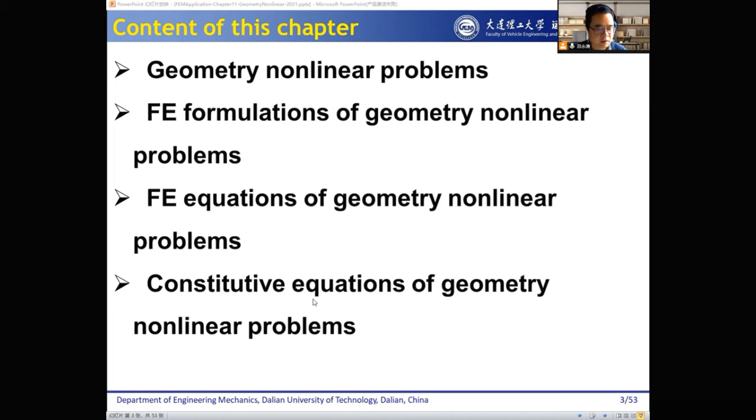For this chapter, we will cover four contents. First is the geometry nonlinear problems. Second, we will go through the FE formulations of the geometry nonlinear problems. Third is the FE equations of the geometry nonlinear problems. And fourth is the constitutive equations of geometry nonlinear problems.

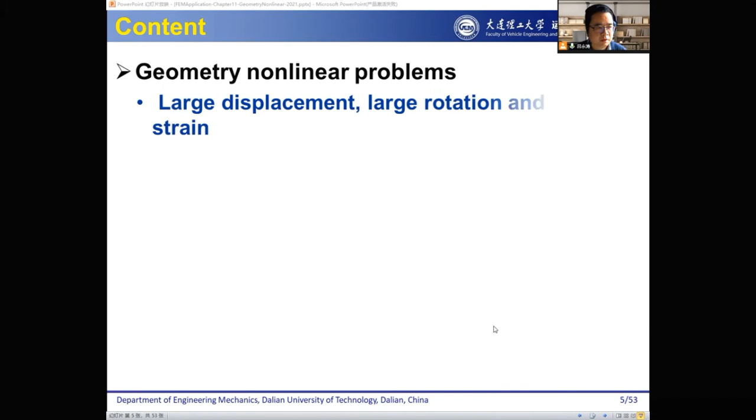Part 1 is the geometry nonlinear problems. First is the definition of the geometry nonlinear problems. So what are the geometry nonlinear problems? It means large displacement, large rotation, and small strain.

This is the first case: large displacement, large rotation, but small strain. And the second case is large displacement, large rotation, and also large strain.

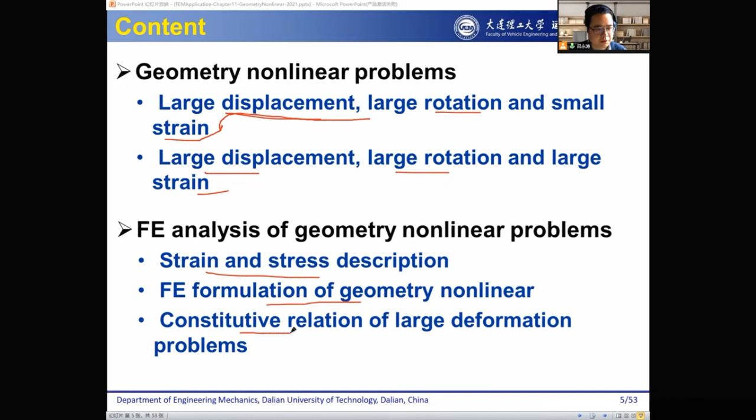And the FE analysis of geometry nonlinear problems: we will talk about the strain and stress description, the FE formulation of geometry nonlinear problems, and also the constitutive relation of large deformation problems.

So here is the definition of geometry nonlinear problems. We said we have two scenarios, and the first scenario is large displacement, large rotation, and small strain. So we use a figure to illustrate this.

In this condition, all the theory we have for the small deformation theory cannot be applied to this scenario. So therefore we have to consider the geometry nonlinear problems, and we have to consider different formulations and use different theories to solve these problems.

We see here the linear theory cannot be applied. In the previous chapter, we all assumed, for example, the geometry equation and the constitutive equation based on the linear theory. But here we cannot apply those theories, and we have to change it. We have to use different theory.

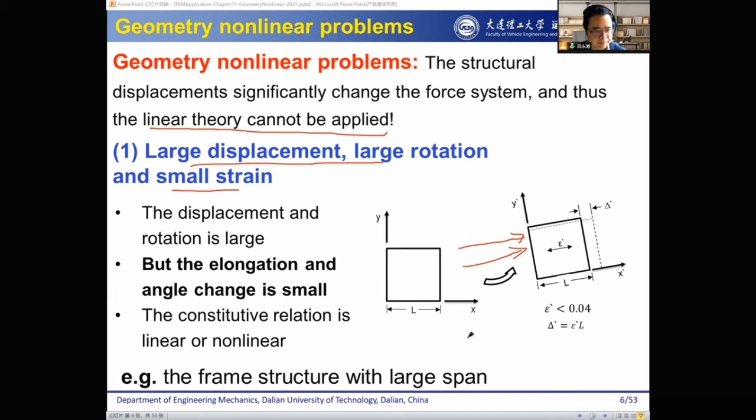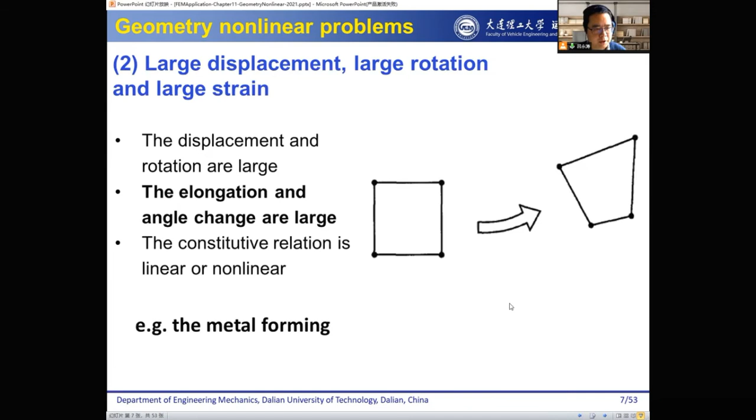And we said for the geometry nonlinear problems, we have to use new theory, new equations and formulations to solve it. And here, also for the strain, we have to define new concepts or new strain variables to describe the large deformation or the geometry nonlinear problems.

We introduce to you how we get those new definitions, how we get those new variables. So to describe the geometry nonlinear problems, we have to use the configuration.

We have to use the configuration. Configuration is the states of the deformed body at different time points. For example, here we say the initial configuration is the deformed body at time 0, before the deformation.

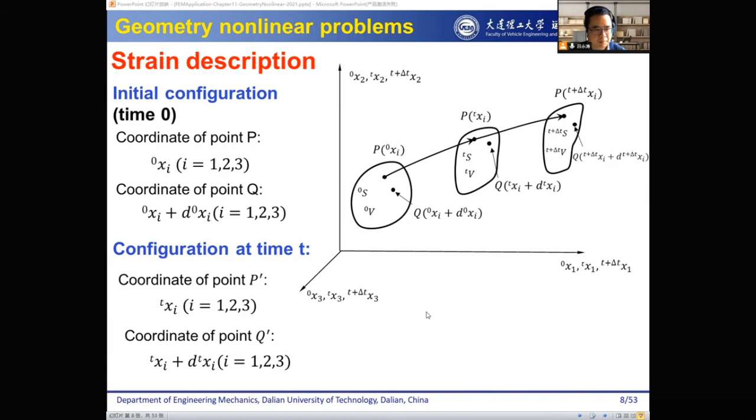So this is the way how we describe the geometry nonlinear problems. And then we come to the strain description. So the change of point location from the initial configuration, that is the time 0 configuration, to the current configuration, that's the time t configuration, can be seen as a mathematical transformation. So the change of point location, from the mathematical point of view, is just a transformation.

So we have the variables in the initial configuration, and then we have the variable in the current configuration. There's a kind of mapping or mathematical relationship between them. Because of the one-to-one mapping, we know it's the same deformable body. You are not able to add more points or remove any point from the deformable body, it's still the same deformable body. Therefore, there's a one-to-one mapping of the points, and the inverse transformation also holds. So we can also use the current configuration variables to calculate the initial configuration variables.

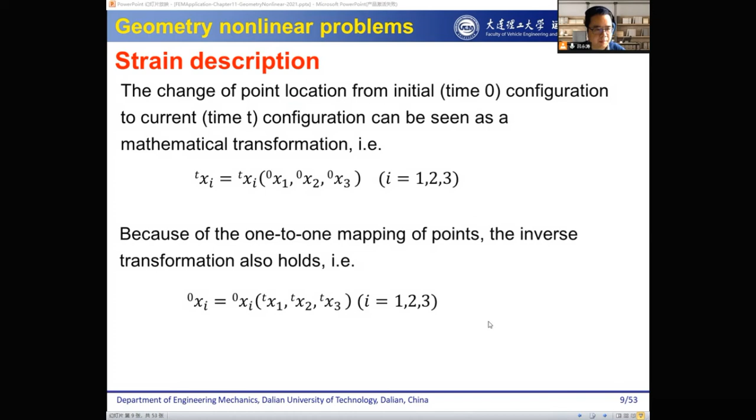So this is what we have in our mind. We have this mathematics in our mind. Then we can divide the strain description in different systems.

Okay, so first we describe the strain in the Lagrange coordinates. Here is the definition for the Lagrange coordinate. What is Lagrange coordinate? It takes the coordinate at the initial configuration as the unknowns to describe the variable, and uses the initial configuration to describe the deformed configuration. So in Lagrange coordinates, the unknown variables are the variables in the initial configuration, because all of them are at time 0, and then we use it to describe the variable in the current configuration. Therefore, it's using the Lagrange coordinates.

Or, in comparison, we have the Euler coordinates. What are the Euler coordinates? The Euler coordinate takes the coordinates at the deformed configuration as unknowns to describe the variable, and uses the deformed configuration to describe the initial configuration. So it's inverse - they use the variable or coordinates in the current configuration to describe the variable in the initial configuration. If we do this, we say it's using the Euler coordinates, described in the Euler system.

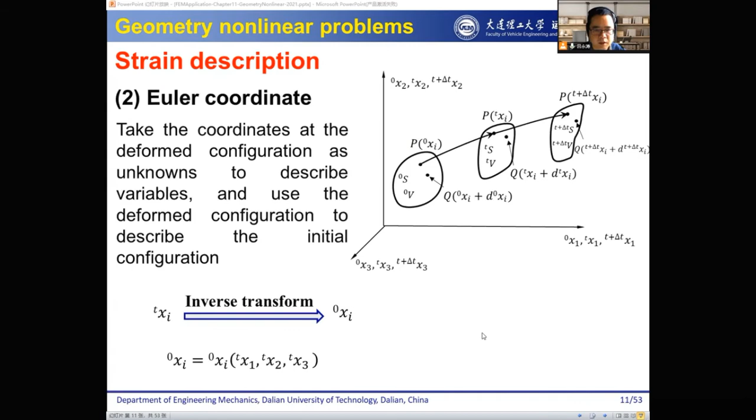So then let's have a look at how we derive the strain, how we work out the formula or expression for the strain in different coordinates or different systems. So first, in the Lagrange coordinate, we already know we use those unknown variables in the initial configuration as the unknowns, and use those to describe the variable in the current configuration. Then our strain, we can write out dxit.

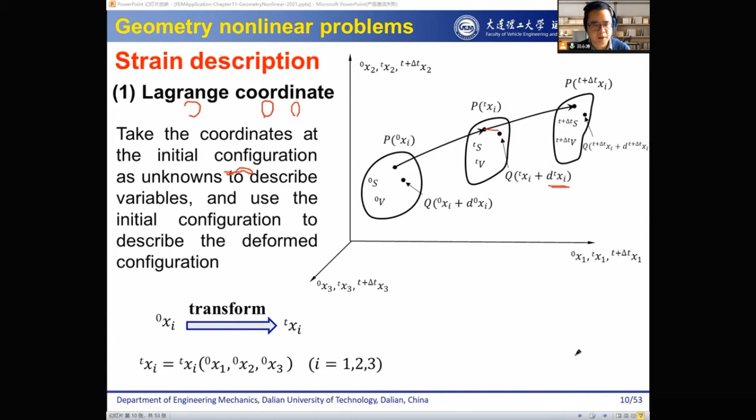What is dxit? We should come to here. This is dxit, that's the distance between P and Q in the current configuration. So this is PQ, the distance of PQ in the current configuration, and dxj. What's dxj? We use j because we want to make a difference to the i. So this is PQ in the initial configuration.

Okay, so we can do the mathematics here. Then we get this result, so we introduce a new symbol. This is our new symbol, similar to the index notation. We want to simplify the writing of these expressions, so people introduced this new symbol, or new rules, to replace the old one. So let's have a look.

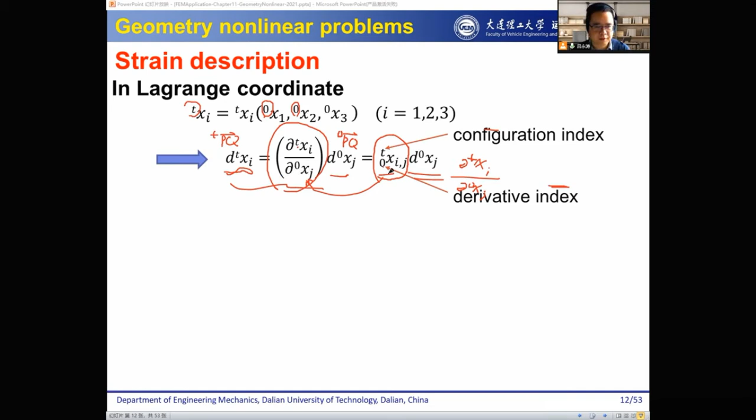So this t means it's the one in the numerator, and this 0 means the one referring to the denominator, and this comma means we take the partial derivative. So this equals partial x. The first i is the one appearing in the numerator, so we say the superscript is the one appearing in the numerator, and this subscript is the one appearing in the denominator, and after the comma, the index appearing in the denominator. So this one is actually this one, but if we write it in this form, it's much easier and much simpler.

And then accordingly, we can have the definition in the Euler coordinates. In the Euler coordinates, we use the variable in the current configuration as the unknowns, and we use it to describe the variable in the initial configuration. And therefore, based on the mathematics, we can have this formula, and we have this symbol.

Then we want to work out the strain. The strain, from the previous lecture, we know, is the change of the length divided by the initial length. Therefore we have to work out the change of the distance between P and Q. If we work out the distance in the initial configuration and in the current configuration, then based on the concept of strain, we can work it out.

Okay, so let's work out the distance. Because it's a distance, we use the square. So ds0, which means this is the ds squared, is dxi0 times dxi0. This dxi0 is the distance between P and Q in the initial configuration, but there's a symbol here which means it can be positive or negative, therefore we take the operation of squaring.

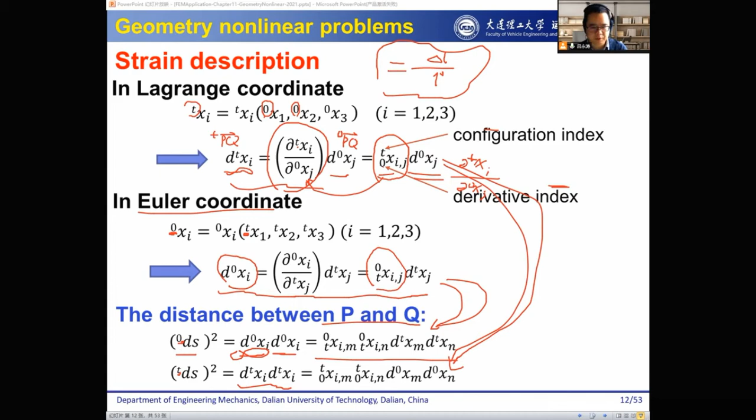And then we want to work out the change of the line, or the change of the distance. The change of distance can be expressed as this, and it can be expressed in two ways. First, using x0, this is in the Lagrange coordinates. Then using xt, this is in the Euler coordinates.

And then from here we know this is the strain, so we can have the definition of strain in two systems: this is Lagrange, using this variable, and this is Euler, using a different variable. But we cannot just say this is the strain in the Lagrange coordinate and this is the strain in the Euler coordinate, so we have to give them new names in order to refer to them.

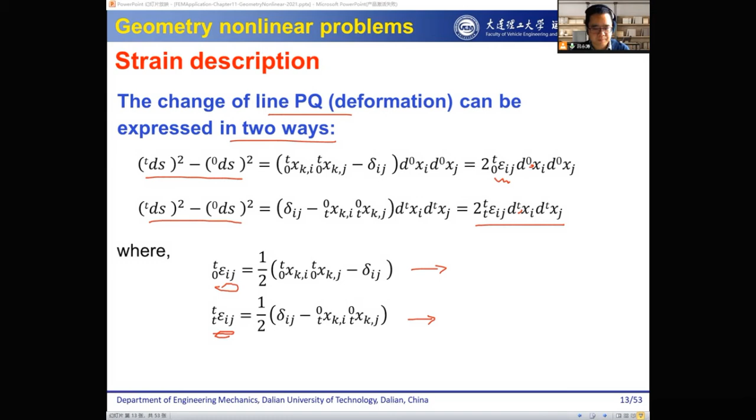So, the strain in the Lagrange coordinate we call the Green strain tensor. This is a very important concept, so whenever you hear about the Green strain tensor, you should have this formula in your mind, and you should know it is defined in the Lagrange coordinate, which means the variables here are the unknowns.

And in comparison, we have the strain in the Euler coordinate system, which is called the Almansi strain tensor. In this formula you have xi,t as the unknowns, because in the Euler coordinate we use the variable in the current configuration as the unknown, and the variable in the initial configuration can be expressed using the variable in the current configuration. This is the concept you should keep in mind forever.

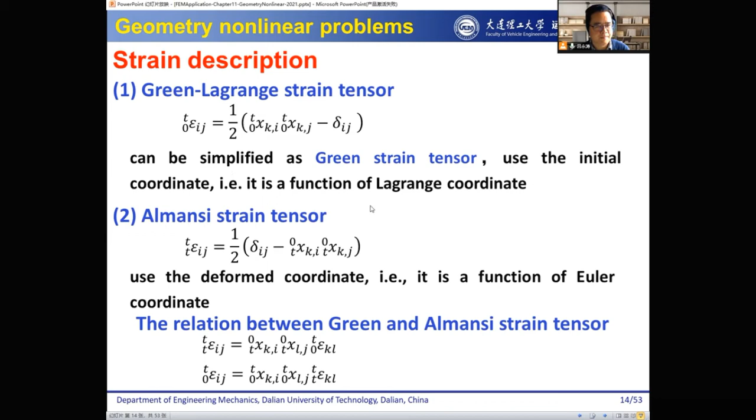So here we have our strain description in geometry nonlinear problems. Let's look at the strain-displacement relationship for geometry nonlinear problems. The displacement of a point from time 0, the initial configuration, to time t, the current configuration, can be expressed as this. This is the point at the current configuration, and this is at the initial configuration. So we can describe the displacement, and then we have this.

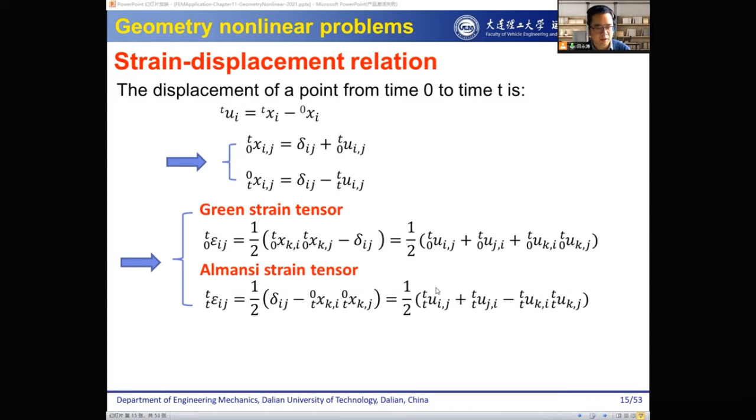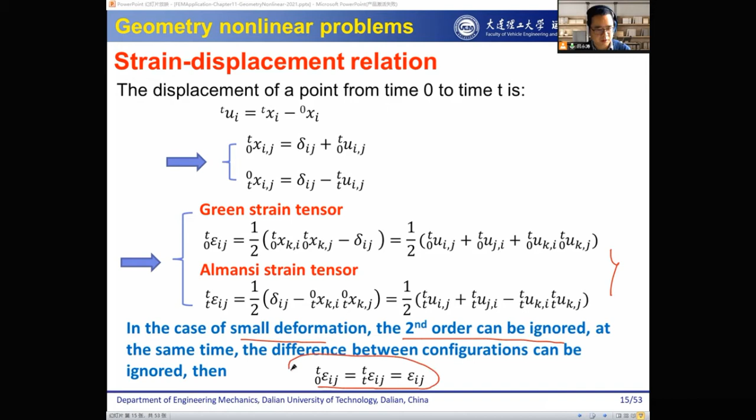By this way, we have worked out the strain-displacement relationship for geometry nonlinear problems, and we can see they are different from the linear case. But if you reduce this to the small deformation case, the second order terms can be ignored, and then those formulas reduce to the linear elastic small deformation formula.

Let's introduce another very important concept, the deformation gradient. The deformation gradient is the vector difference between P and Q. So we have P and Q, and it's the vector difference. Let's look at the vector first in the current configuration, then in the initial configuration. In the current configuration, from P to Q, we describe it as dx_i,t. In the initial configuration, it's dx_i,0, and these are based on the...

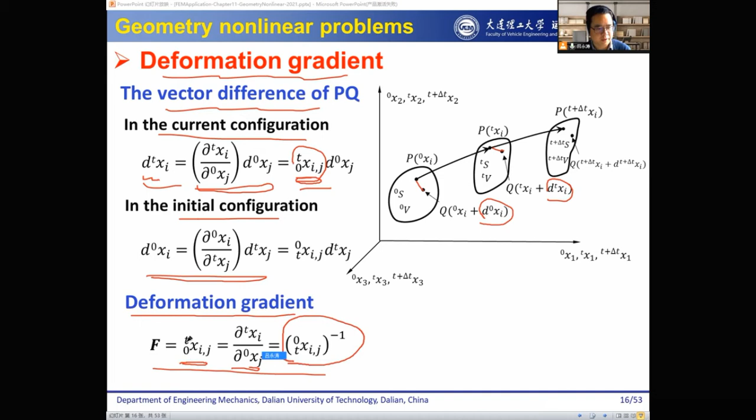This is the mathematics. We can express it like this, and then we introduce this symbol, and express it like this. So we said we define the deformation gradient as the vector difference between these two, between P and Q. Therefore we define it as this, and from the mathematical point of view, it equals to this. So this is our deformation gradient, presented in the current configuration, and we can also express it in the initial configuration. So this is the definition for the deformation gradient. Let's have a look.

How do we work out the deformation gradient? We use an example to demonstrate how we can work out the deformation gradient.

The relationship between the nodal coordinates and time are known. So for this one, it's a triangular element. We have points 1, 2, and 3, and this is at time 0, or the initial configuration, and this is at time t, the current configuration. So it moves to this one. We can see what it's doing - it's doing a rotation, right? You see, it's doing a rotation.

So therefore, we say point 2 moved upwards, and point 3 moved anti-clockwise. We define those variables - the coordinates at time t, coordinates x2 and y2 at time t were this function. We defined the coordinates for point 3 with this function, and by using all this information, we want to work out the deformation gradient for this deformable body.

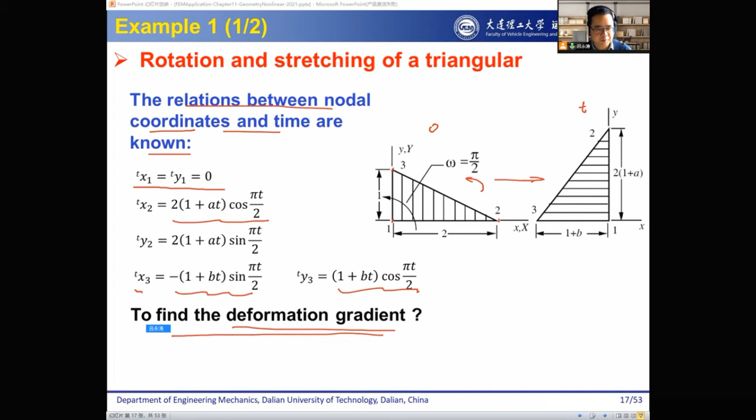Let's have a look at the procedure. At time t, the coordinates of any point within the element, we can write those out. This is based on the interpolation, the idea of interpolation.

So we have the coordinates at the 3 points - these are the 3 points - and then this is ξ1, ξ2, ξ3, which are our interpolation functions. Based on the idea of interpolation, we can work out the coordinate of any point within the element. Then we can work out, at time 0, the initial configuration, by setting t equal to 0. Then we have the configuration or coordinates at the initial configuration. Similarly, for the y coordinate, if we set t equal to 0, then we have the coordinate at time 0.

And then because x10 equals x30 - at time 0, we say the coordinate, this is our x, this is our y - at this initial configuration we can notice the x coordinate of 1 and 3 are equal, and the y coordinate of 1 and 2 are equal. At this initial configuration we also notice for point 2 the coordinate is 2, and for point 3 the y coordinate is 1. So we know all this information from the figure, and then we can work out.

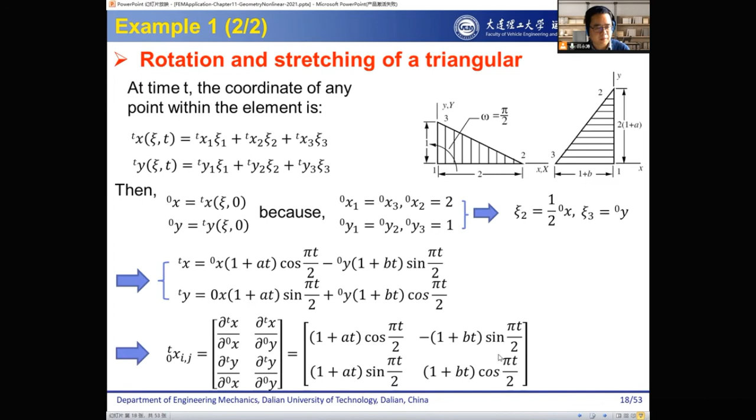By using those equations we can work out the parameters, work out the coefficients for ξ2 and ξ3, and then we can express those equations. After we work out, we can rewrite those equations for x and y, and then based on this, we take the partial derivative to the corresponding variable. Then we can work out this variable - this is the mathematical part of it, and this variable is our deformation gradient. So by this approach we have worked out the deformation gradient.

Second example - let's have a look at how we work out various strains for the one-dimensional problem. Up to now we have introduced the strain defined for the small deformation case, and two strains defined in the large deformation case, or the geometric nonlinear problem case. Here we have a look at how we calculate the different strains.

So we have a 1D problem here, and this is the initial state at time 0, and this is at time t. The initial length is L, and the current length is small l. We have the displacement expressed in this term - this is x(t), and this is x(0). Therefore, the displacement can be expressed in this term, and we want to work out different strains.

First is the engineering strain. We say engineering strain is most used in the small deformation case, and is the change in length divided by the initial length. Because it's a small deformation case, we don't have the higher order term. But these two strains are defined for geometric nonlinear problems, therefore we have the higher order term, to more accurately describe the problem.

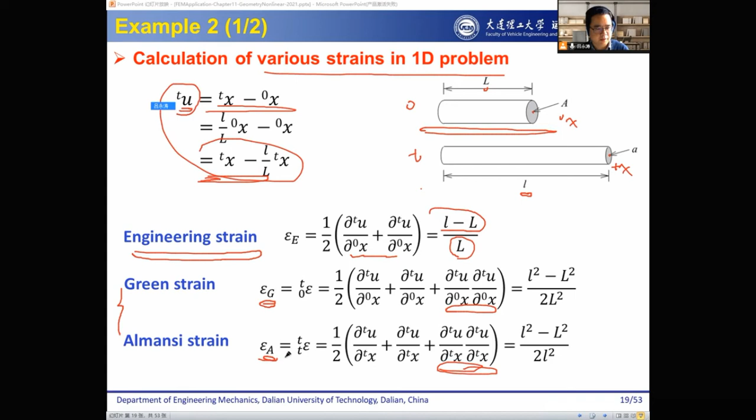So we have the Green strain. Besides, the Green strain is defined in the Lagrange coordinate. And we have the Almansi strain - this is defined in the Euler coordinate system. Then by using this equation, we can work out the Green strain and the Almansi strain.

For the Green strain, we take the partial derivative with respect to x0, because this is our unknown variable. For the Almansi strain, our unknown variable is xt, so we take the partial derivative with respect to xt.

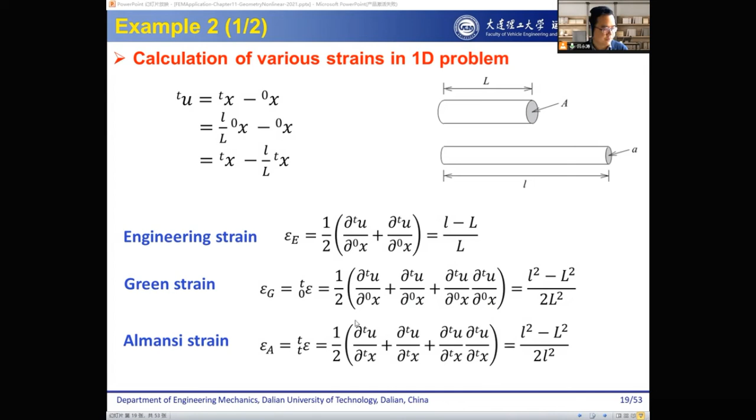This is a very important concept. You cannot use the engineering strain for the large deformation case or the geometry nonlinear case. If you use this, it's wrong, absolutely wrong. You have to use different strains for different scenarios.

When it is bigger than 1.0, it is lengthened, so it becomes longer. When it is smaller than 1.0, it is shortening, becoming shorter. On the y-axis we have the strain. When there's no deformation, the length doesn't change, so the strain is 0. When it becomes longer, we have positive strain; when it becomes shorter, we have negative strain.

So this is clear. When there is small deformation, the strain is small, and we regard this as the small deformation case. In the small deformation case, the values for the three strains are identical.

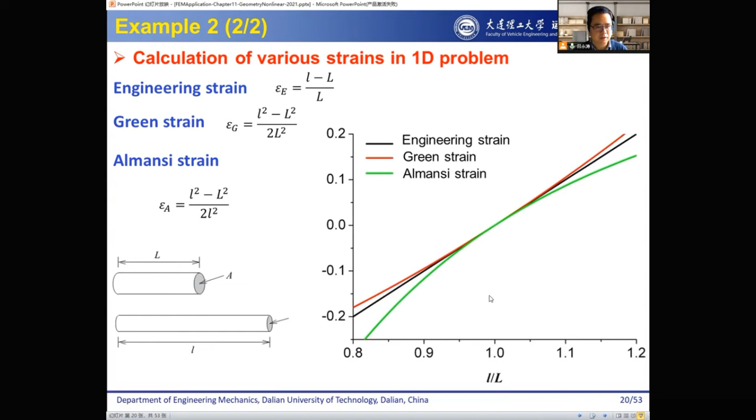So it's very important you keep this figure in mind forever. Don't make mistakes when choosing which strain to describe your problems. We have talked about strain description, and said that for geometry nonlinear problems we have different strains, and we should use the appropriate one for different scenarios. Now we talk about the stress description for geometry nonlinear problems.

Here is the definition for stress. We look at the figure with the Lagrange coordinates and the Euler coordinates. We have x0 and xt, x0 in the Lagrange coordinate, xt in the Euler coordinate.

For the geometry nonlinear problem, we have the Cauchy stress, which we call the true stress. Cauchy stress is the force in the unit area in the deformed configuration, similar to the true strain.

For the true strain, we divide in the deformed configuration. And we have the engineering stress, which uses the force in the unit area in the initial configuration, corresponding to the engineering strain, which is the change in length divided by the initial length.

Let's have a look at the stress. Before deformation, the stress is the force divided by the initial area. After deformation, the stress is the force divided by the deformed area, or the area in the current configuration.

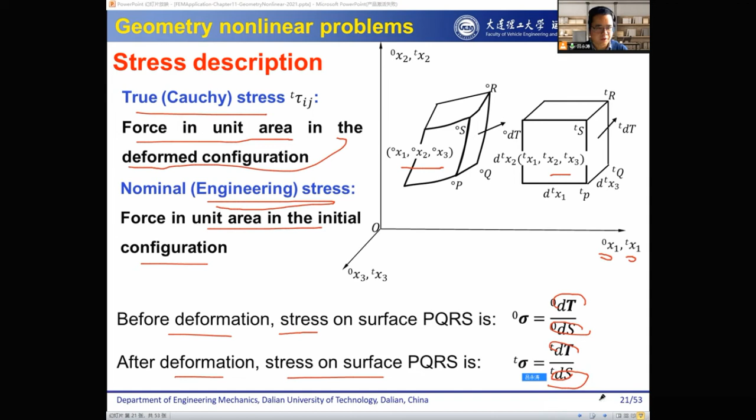There's a relationship between the surface force before and after deformation. This should be easy to understand. Then we have the Lagrange definition, where the force component is equal before and after deformation. If we use the Lagrange definition, the surface force before deformation, that's the initial configuration, and after deformation, that's the current configuration, are made equal to each other.

And we have the Kirchhoff definition. By the figure, it corresponds to this: we have the initial configuration and the current configuration, and the surface force is equal to each other in the two configurations.

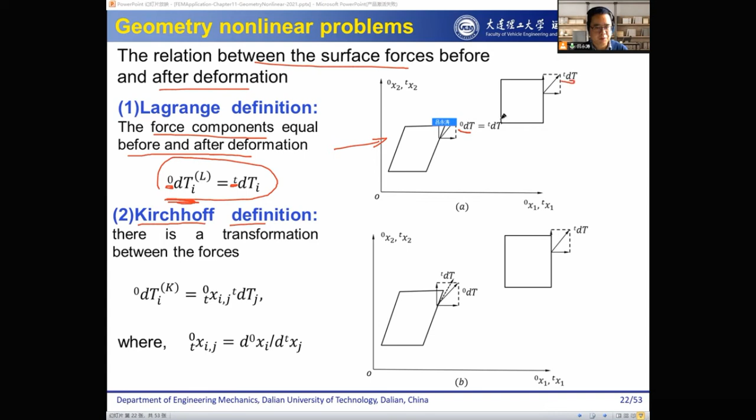This is the Lagrange definition. But in the Kirchhoff definition, there's a transformation between the forces. So we have the force in the initial configuration and the force in the current configuration. They don't equal each other, so there's a transformation between them, described by this transformation function. This is the definition because we want to describe different scenarios.

I think there'll be a mistake here. It should be - sorry, this is right. So this is the definition of this variable.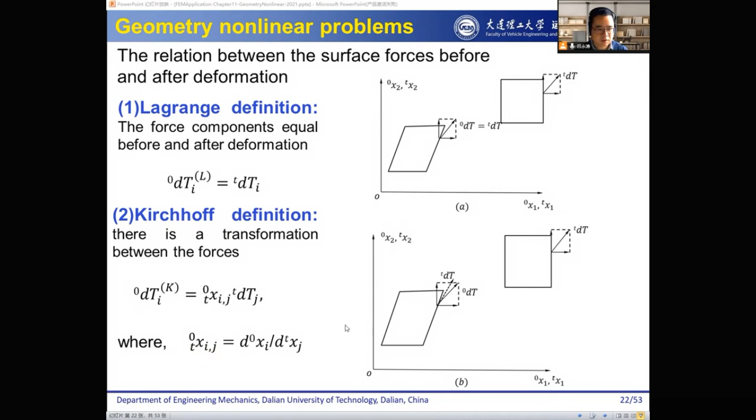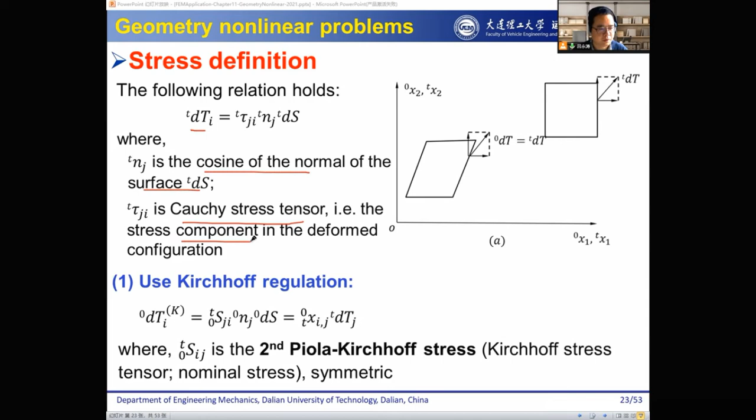Then we have the stress definition. We have the following relationship holds, where n is the cosine of the normal of the surface, and tau is the Cauchy stress tensor. That's the stress component in the deformed configuration. So we have the following relationship.

First we use the Kirchhoff regulation, which means we use this assumption that the forces don't equal each other. Under the Kirchhoff definition, we can express the force, and this one is the Kirchhoff stress, which we call the second Piola-Kirchhoff stress, or Kirchhoff stress tensor, or nominal stress, because it uses the surface area in the initial configuration.

Then we use the Lagrange regulation. Using the Lagrange regulation, this is the surface force in the initial configuration, and this is the surface force in the current configuration. Then we can obtain another variable, which we call the first Piola-Kirchhoff stress, or the Lagrange stress, because we are using the Lagrange regulation.

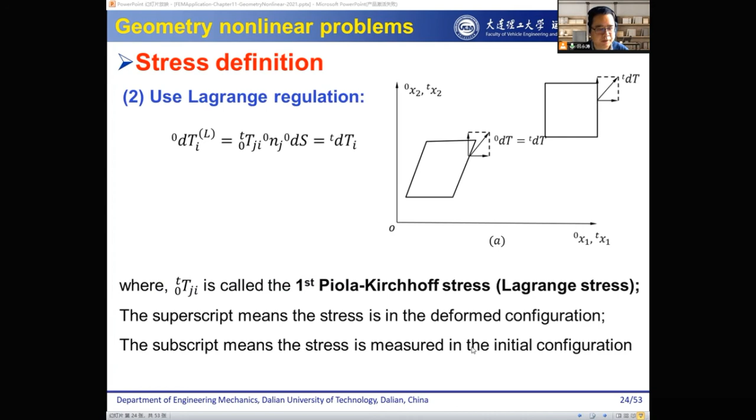So for the stress, we have introduced two very important concepts that you will meet very often in your future study or engineering problems: the second Piola-Kirchhoff stress, also called Kirchhoff stress or nominal stress, and the first Piola-Kirchhoff stress, or Lagrange stress. You should be very clear how they are obtained and what's the difference between them. We should know these are the stresses for geometry nonlinear problems, so it's for the large deformation case.

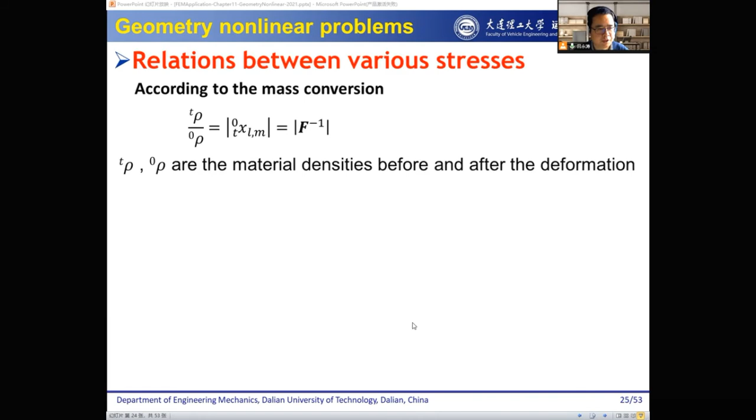From the mathematical point of view, we can also know there's a relationship between different stresses. According to mass conservation, the mass doesn't disappear, so we have this mathematical formulation, and then we can obtain the relationship between the Cauchy stress and the first Kirchhoff stress. Also we can obtain the relationship between the Cauchy stress and the second Kirchhoff stress.

Also, from a mathematical point of view, we obtained the relationship between the first Kirchhoff stress and the second Kirchhoff stress. So for geometry nonlinear problems, similar to before, we obtained three variables: the Cauchy stress, the first Kirchhoff stress, and the second Kirchhoff stress, and there's a relationship between these different variables.

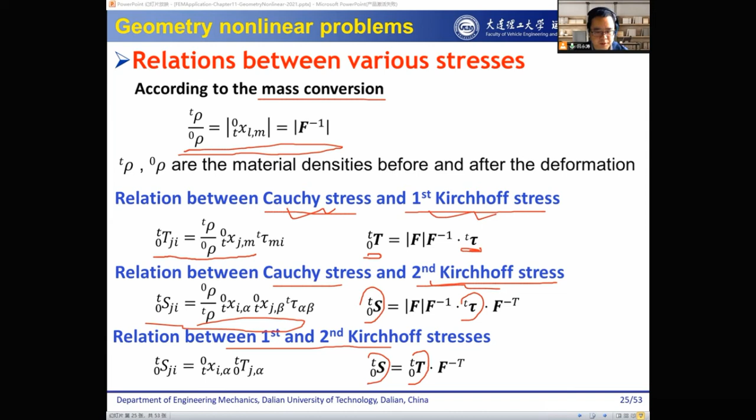So let's have a look at an example to demonstrate how we calculate different stresses for geometry nonlinear problems. We have a deformable body here, and what it's doing, I think, is rotation. Okay, it's doing the rotation. Let's have a look.

We use the deformation gradient to describe the deformation, and we gave the initial Cauchy stress, and we have the deformation gradient, and we want to work out other stress components like the first Kirchhoff stress and second Kirchhoff stress. We set the time t, because the deformation gradient is a function of t, and we set time t as this.

Then we get the formulation for the deformation gradient, the Jacobian of the deformation gradient equals 1, and then our Cauchy stress equals this. Based on the relationship between Cauchy stress and the first Piola-Kirchhoff stress, we can work out, from the mathematical point of view, the first Kirchhoff stress. Similarly, we can work out the second Kirchhoff stress. There's nothing we want to go into too much detail about, because this is only the mathematics here.

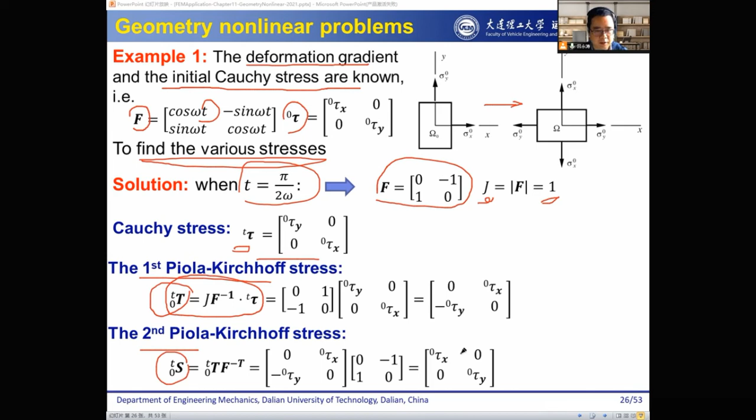And then the second example is to work out the various stress for the uniaxial tension problem. So we have a uniaxial tension. For the uniaxial tension, we want to work out the various stress, and this is uniaxial.

And because it's a uniaxial tension problem, we have this relationship. This is the deformed length, this is the initial length, and this is the deformed dimension in the y direction. This is the initial dimension in the y direction, and this is the deformed dimension in the z direction, and this is the initial dimension and the length in the initial length.

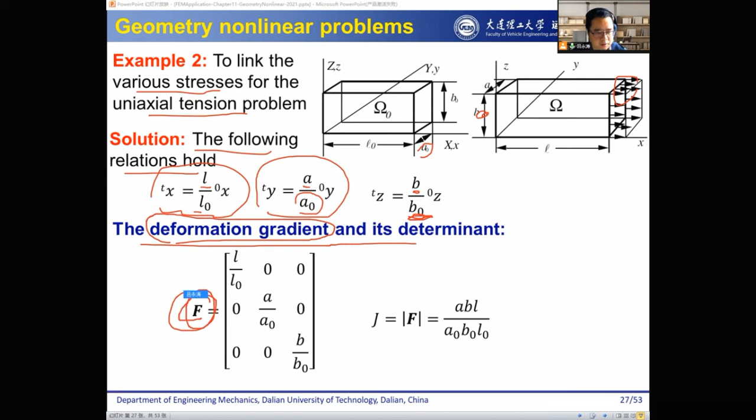Then we work out the deformation gradient. Deformation gradient is very important for geometry nonlinear problems, because all other variables are worked out from the deformation gradient. So by using these equations, we can work out the deformation gradient for these problems, and then continue our calculation to work out other variables.

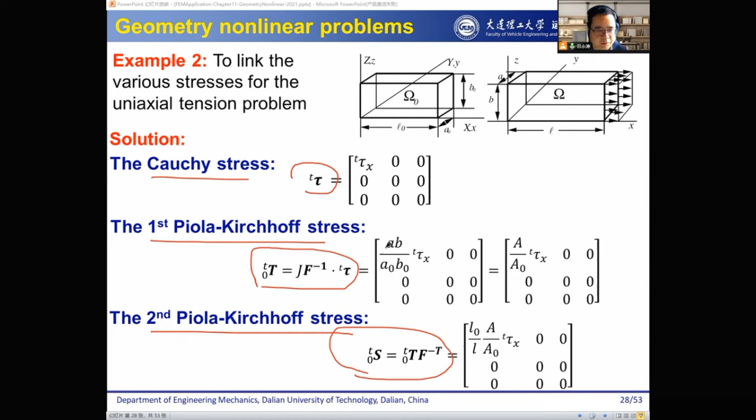First is the Cauchy stress. Second is the first Piola-Kirchhoff stress. Third is the second Piola-Kirchhoff stress. Once we work out the Cauchy stress, we can use the relationship to work out the first Piola-Kirchhoff stress and the second Piola-Kirchhoff stress. This is also mathematics, so we don't repeat it here. You should practice working it out by hand yourself to see whether you can get those results or not.

So then part 2 is FE formulations of the geometry nonlinear problems. For this part, we are going to quickly go through it. We don't go into too much detail here.

For the FE formulations, similar to the previous problems, we use the virtual displacement principle. But the difference is we use the variables in different configurations to represent the quantities and to represent points.

So we have those three variables: this is referred to the coordinates at time 0, this is referred to the coordinates at time t, and this is referred to the coordinates at time t plus delta t. Then u is the point displacement referred to time t, this is referred to time t plus delta t, and we have the relationship between each other. Then the displacement increment can be written as this - it's the difference between the displacement at t plus delta t minus the displacement at t.

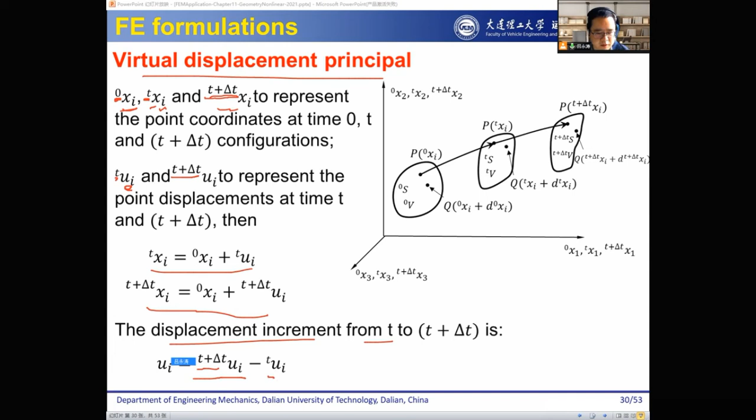Then we can write out the virtual displacement principle at t plus delta t. For geometry nonlinear problems, you have to mention which time point you are working at. This is important here because we are working at t plus delta t, so we have all those variables expressed at t plus delta t. Here the tau is the Cauchy stress at the t plus delta t configuration. Then we have the strain, then we have the virtual work at t plus delta t.

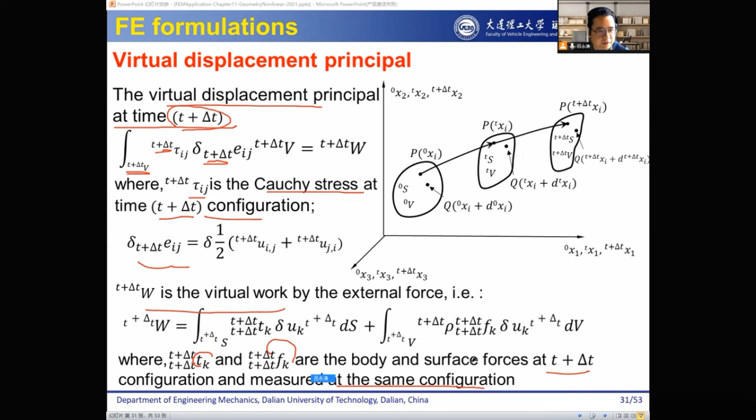And here this is the body force, and this is the surface force at the t plus delta t configuration, and they are measured at the same configuration - so they are measured maybe at the current configuration.

Then we have the virtual displacement principle expressed as this. It's very similar to our previous equation, but the only difference is we have put the configuration into those formulas. Because the variables at the t plus delta t configuration are unknowns, we use those as the unknown, the above equation cannot be solved, so we need to refer to one known variable or known configuration, and therefore the following two methods are proposed. Depending on which configuration we take as the known configuration, we have different methods.

First is the total Lagrange format. In the total Lagrange format, the variables use the initial configuration as the reference configuration. Then we have the updated Lagrange format. In the updated Lagrange format, all the variables use the deformed configuration - that's the configuration at t - as the reference configuration, and therefore the configuration keeps changing in the solving process.

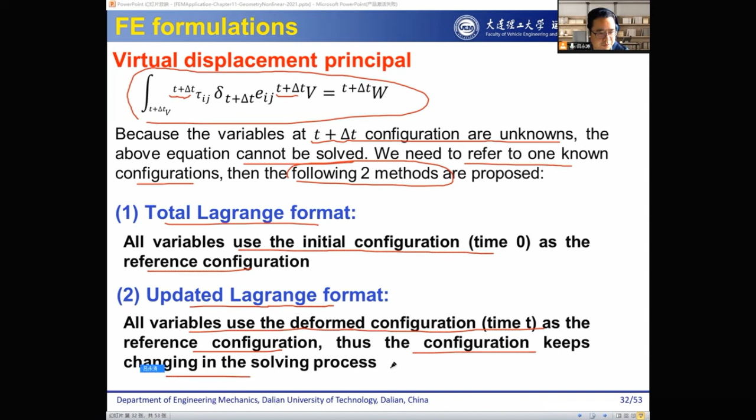First is the total Lagrange format. In the corresponding virtual work principle, the deformed configuration is transformed into the initial configuration, because for the total Lagrange format we use the initial configuration. Therefore we change to the initial configuration, and those are the zeros - these are the initial configuration.

We mentioned we have the 1-to-1 mapping, therefore we can easily make the transformation, and the transformation process is as below. So we have the surface and body force equations, and we have the mass conservation principle. We take use of those equations to do the transformation - those are the many mathematics involved.

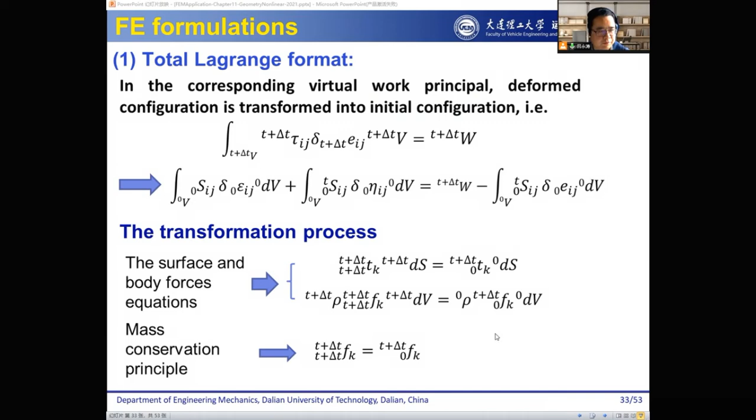Then we have the variation of the strain, and also for the strain we use the total Lagrange format. Therefore we have the Kirchhoff stress and the Green strain tensor at the t plus delta t configuration. We use the initial configuration as the reference, and then the virtual displacement principle based on the initial configuration can be written as this. We use those as the reference. So this is the total Lagrange format.

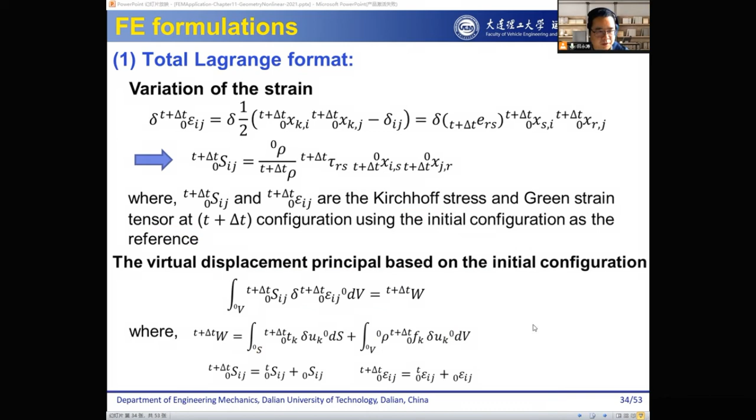Then we have the updated Lagrange format. In the updated Lagrange format, the corresponding virtual work principle, the deformed configuration is transformed to the time t configuration. So we say this is after the transformation. So we have the variable in the current configuration - we have transformed those into the current configuration, therefore we expressed it in the updated Lagrange format.

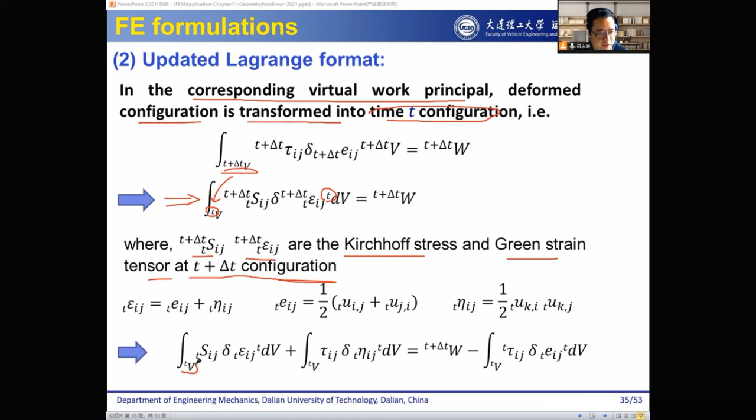And those are the variables - those are the Kirchhoff stress and the Green strain tensor at t plus delta t configuration. We have transformed all of them into the time t configuration - these are the time t configuration.

Then we have the process of linearization of the equilibrium equation. The virtual displacement formulations are nonlinear, and therefore we linearize this equation first, and then solve them. Similarly, for the linearization of the relationship, we have two formats: the total Lagrange format and the updated Lagrange format. The difference is we take different configurations as the reference.

Some discussion points here: first, the relationship only applies to linear elastic material. For elastic plastic material, the linear relationship applies to link stress and strain rate. For other materials, rather than linear elastic material, when the increment is small enough, the above relationship can be applied, and when the increment is a finite value, the relation is an approximate value. An iteration method is usually applied to update the stress.

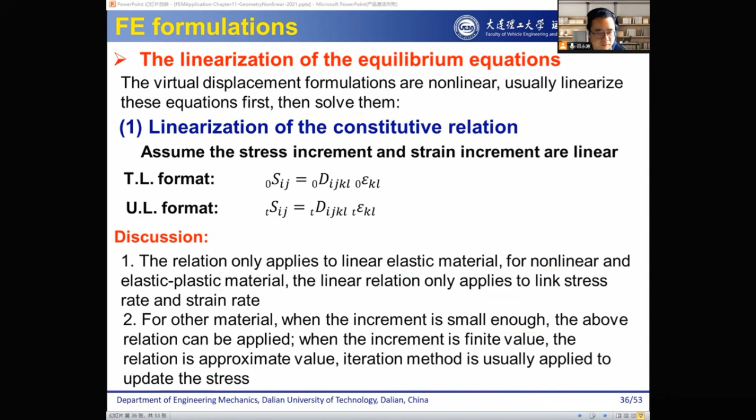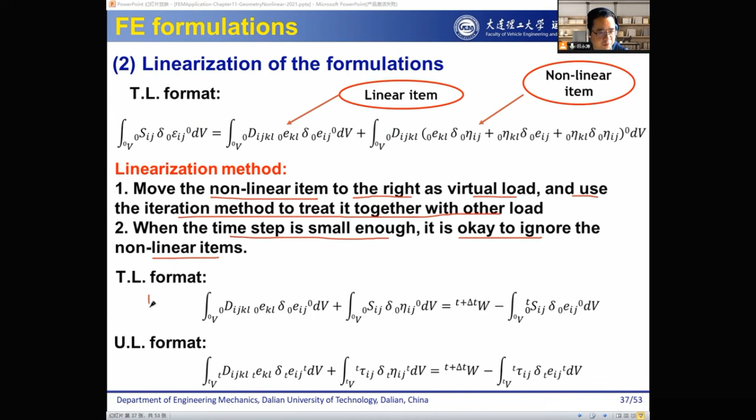For the linearization of the formulation, we have the total Lagrange format - this is the linearization method. We move the nonlinear item to the right as virtual load, and use the iteration method to treat it together with other loads. When the time step is small enough, it's okay to ignore the nonlinear term. So we have the linearization equation in the two kinds of formats.

So part 2, we have very quickly gone through those - these are many mathematical equations, and it's not very important, but if you are interested you can read relevant books. Then part 3, FE equations of geometry problems and its solutions. We have mentioned FE equations before - let's have a look how we apply them to geometry nonlinear problems.

So we have all those equations for the static problems. We have the point coordinate within the element expressed in interpolation. This is our coordinate at the current configuration, this is the coordinate at t plus delta t configuration, and we express it in interpolation format. Those are the coordinates at the nodes, and this is the interpolation function, or shape function.

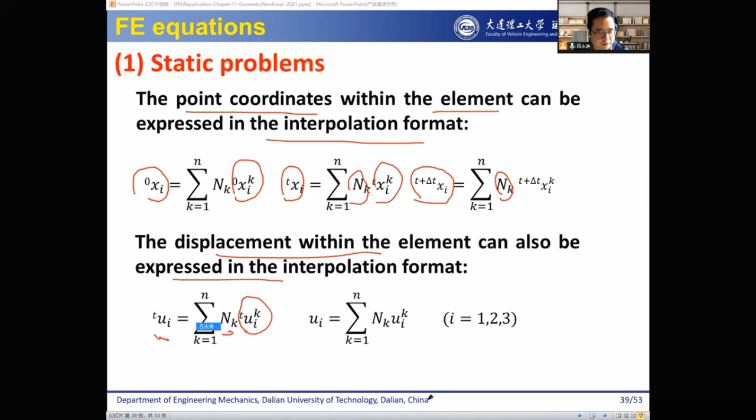And the displacement is also expressed in interpolation format. So this is the displacement, this is the displacement at the node, and this is the shape function or the interpolation function.

Then we have the total Lagrange format equation, which means we take the initial configuration as the reference - therefore these are the zeros, we use initial. This is our stiffness equation for the geometry nonlinear problems. We are very familiar with this equation for the general small deformation case. This is the corresponding equation for the large deformation case, and here we define different variables, including the nonlinear items. This KL0 is the element stiffness matrix in the small deformation case.

So then we have some cases for the geometry nonlinear problems. Here is the stiffness due to the initial displacement, called the initial displacement matrix.

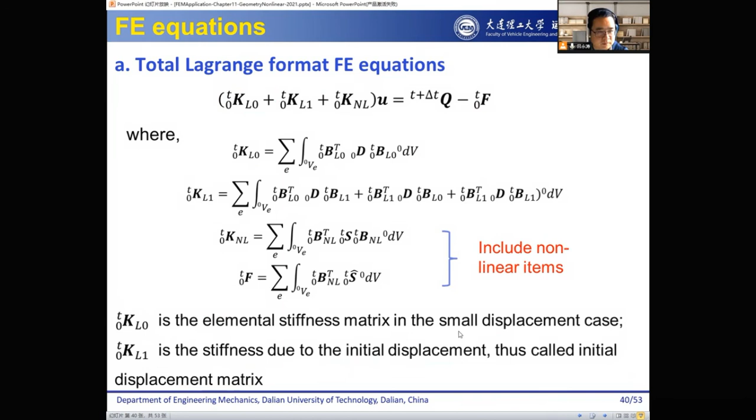Then we can also express the stiffness equation in the updated Lagrange format, using the current configuration as the reference. Here we have the stiffness matrix and the external force. B is the strain-displacement matrix corresponding to the linear and nonlinear strain, and D is the material constitutive matrix, same as the linear elastic case, and tau is the Cauchy stress tensor.

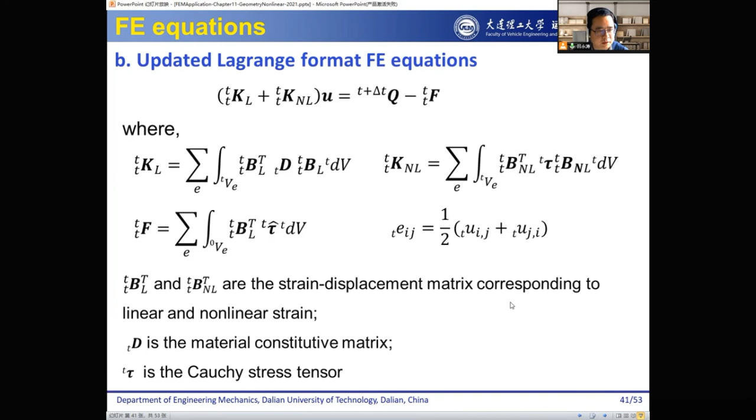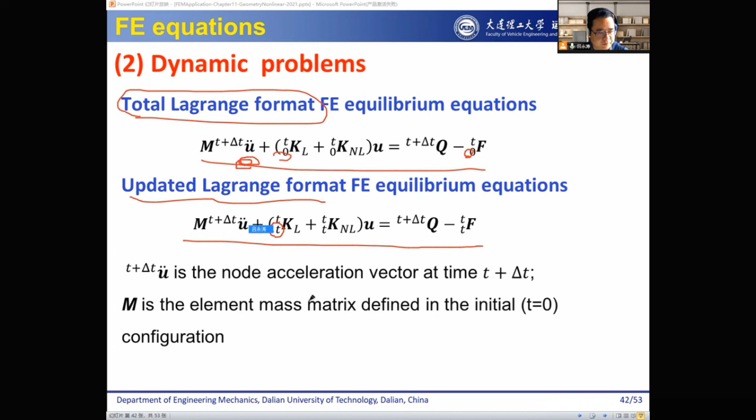This is for the static case, and for the dynamic case we have to introduce the acceleration. For the geometry nonlinear problem, we have two kinds of formats. First, the total Lagrange format, taking the initial configuration as the reference - this is the equilibrium equation for geometry nonlinear problems. For the updated Lagrange format, we use the current configuration as the reference.

Then we quickly go through the method for solving the FE equations. The basic idea is at each time point, or increment step, we use the nonlinear equation solving method to obtain the solution through iteration. The commonly used iteration method is the direct iteration or Newton-Raphson method, as mentioned in the nonlinear chapters.

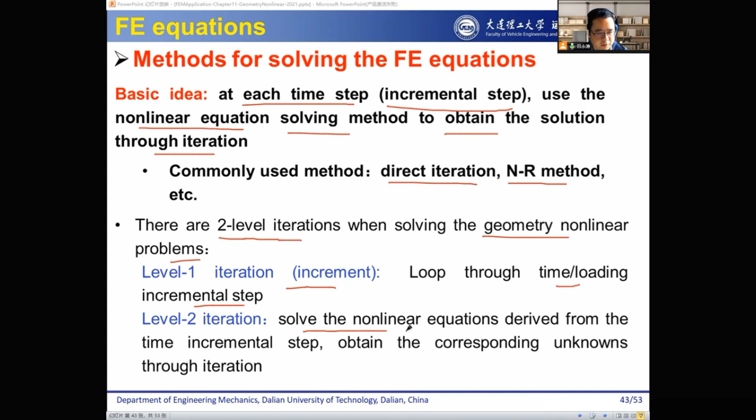There are two level iterations when solving geometry nonlinear problems. The first iteration is the increment - we loop through the time or loading increment step. The second level iteration is to solve the nonlinear equation derived from the time increment step, obtaining the corresponding unknown through iterations. There are two levels of iteration.

Then we introduce the method to solve the FE equations. First, the static problems - this is our stiffness equation in the total Lagrange format, and then we have the stiffness equation in the updated Lagrange format.

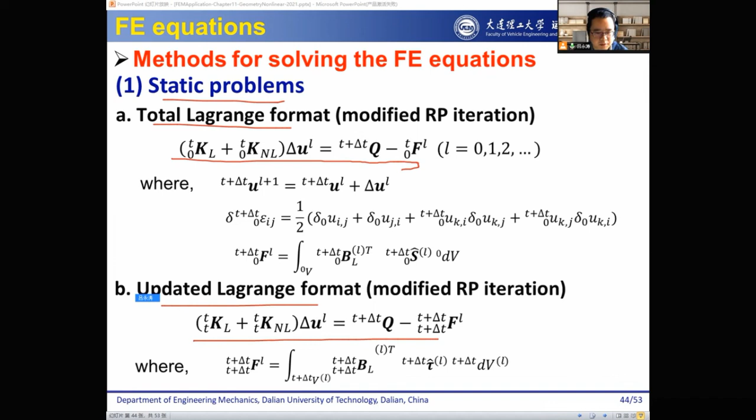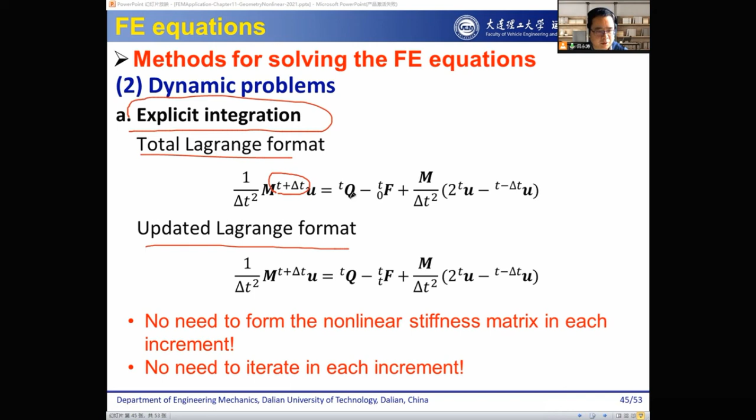For the dynamic case, we have the equation in the total Lagrange format and the updated Lagrange format, using explicit integration. If you still remember the explicit algorithm - for the explicit algorithm, the variable at time plus delta t can be directly solved from the previous variables, the variable at the previous time point. You see in the right hand of the equation, all the variables are from the previous time point. We are using explicit integration here too.

Those can be solved using the values at the previous time configurations. For this method, there's no need to form the nonlinear stiffness matrix in each increment, and there's no need to iterate in each increment. Those are the advantages. Then we have the implicit integration.

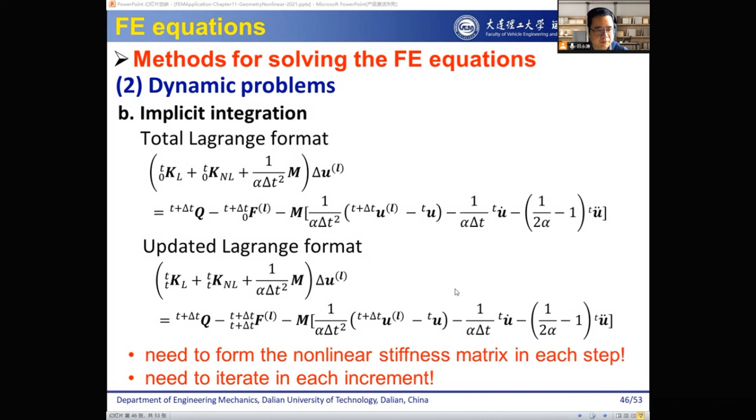For the implicit, you see those variables in the right hand of the equation - this is a dynamic problem, so we have the acceleration in the equations. For implicit integration, we have to form the nonlinear stiffness matrix and iterate in each increment, because those variables cannot be directly solved - we have to do iteration for those nonlinear equations in order to solve this. So for dynamic problems, explicit integration is more efficient than implicit integration, but sometimes explicit integration can give error answers and problems.

Let's do a quick summary of the difference between the total and updated Lagrange format. First, the reference configuration is different. Second, the total Lagrange method contains the initial displacement matrix, while the updated Lagrange method only uses the current displacement matrix. In the total Lagrange method, stress and node force are derived from the Kirchhoff stress. In the updated method, the Cauchy stress is used, so we need transformation through the Kirchhoff stress. In the total Lagrange method, the coordinate transformation matrix stays the same, but in the updated Lagrange method, the coordinate transformation needs to be updated. The updated Lagrange format is more applicable to non-elastic large strain problems.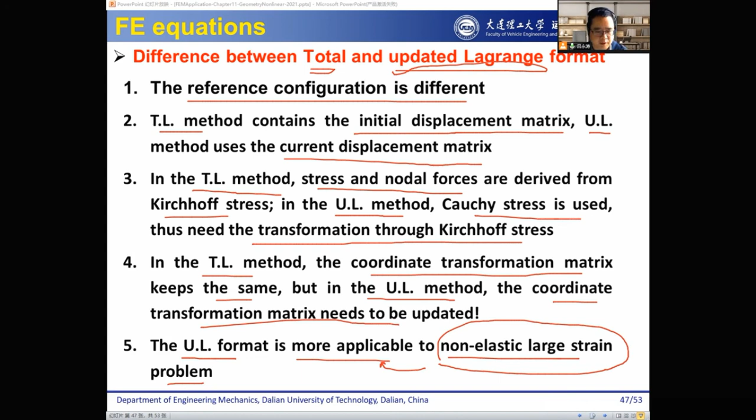This tells you in which scenario you should use the updated Lagrange format. For non-elastic large strain problems, it's better to use the updated Lagrange format. There are many differences between these two formats, and they both have advantages and disadvantages. One format is more suitable for some specific scenarios, and the other is more suitable for other scenarios. In your simulations, it's up to you to decide which one to use based on your knowledge. You have to know all these theories, otherwise you don't know how to make the choice.

Now let's quickly go through the constitutive relationship of the geometry nonlinear problems, which means the stress and strain relationship.

For the geometry nonlinear problem, we have two scenarios. First is large displacement, large rotation, but small strain. In case of small strain, the second Piola-Kirchhoff stress tensor and the Green strain tensor do not change as the object translates and rotates. Their values equal the engineer stress and engineer strain, because there is small strain.

The first scenario is the elastic case, where D is the elastic constitutive tensor, independent of stress and strain, and it is the elastic constant in this case. For the elastic case, we have the elastic constitutive tensor expressed as shown, and this is the corresponding constitutive relationship.

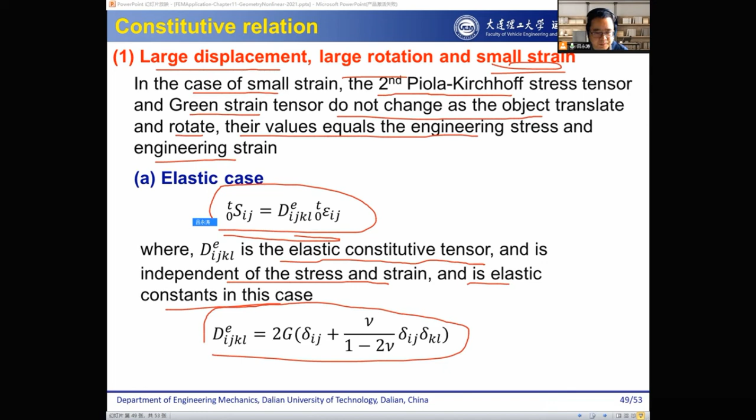The second is the non-elastic case, for the small strain scenario. In this case, we use increments to describe the constitutive relationship, so we use the symbol D. Here ds and d-epsilon are the differential of the Kirchhoff stress tensor and the differential of the Green strain tensor, and the big D is the constitutive tensor at the current configuration. We use the initial configuration as the reference, so the subscript is 0, and the big D constitutive tensor is a function of the Kirchhoff stress tensor and the Green strain tensor.

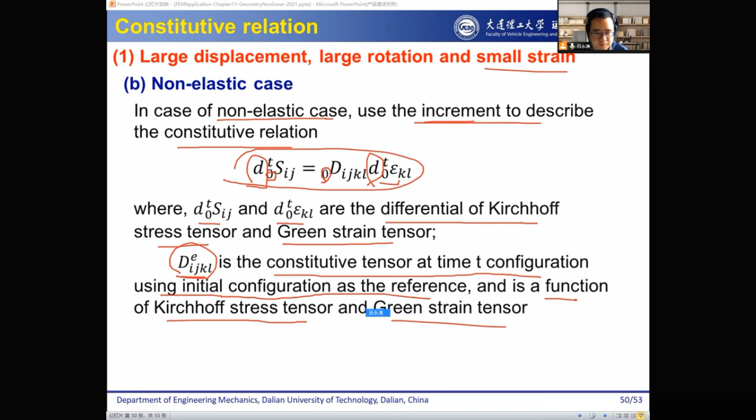Then we have the second scenario: large displacement, large rotation, and large strain. The first case is the elastic case, with examples being hyperelastic materials such as rubber.

For this kind of material, the strain energy density is a function of the Green strain tensor, and can be expressed using strain invariants. For rubber, a very typical model is the Mooney-Rivlin model, which uses strain invariants to express the strain energy density. These are the definitions for the first, second, and third invariants.

From the strain energy density, we can work out the second Piola-Kirchhoff stress, and from there we can derive the constitutive relationship for rubber. This is the elastic case.

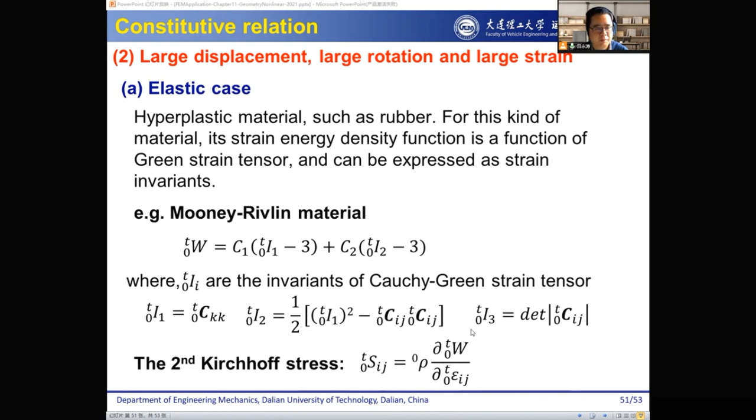This is a quick overview of the constitutive relationship for large geometry nonlinear problems. We can see that for different scenarios and cases, we have very different formulations, and the problem becomes very complex. In this lecture we've just quickly gone through all this, but you need to read more materials to have a deep understanding and to correctly use these theories. I hope in the future you will become a good expert in this area.